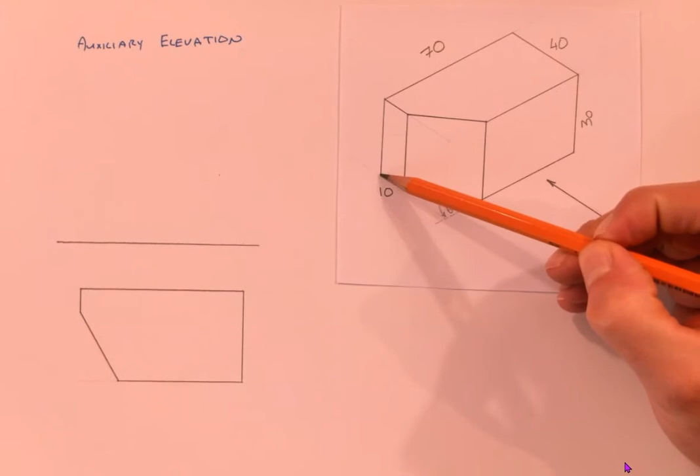We're going to draw an elevation and plan of this block that we have, and then we're going to project an auxiliary elevation. So we basically have just a simple box. Our box is 70 millimeters wide, 30 millimeters high, and then from back to front 40 millimeters. We're going to step in 10 millimeters along the side, and we're going to chop the corner off at 60 degrees. So we have a 60-degree angle here.

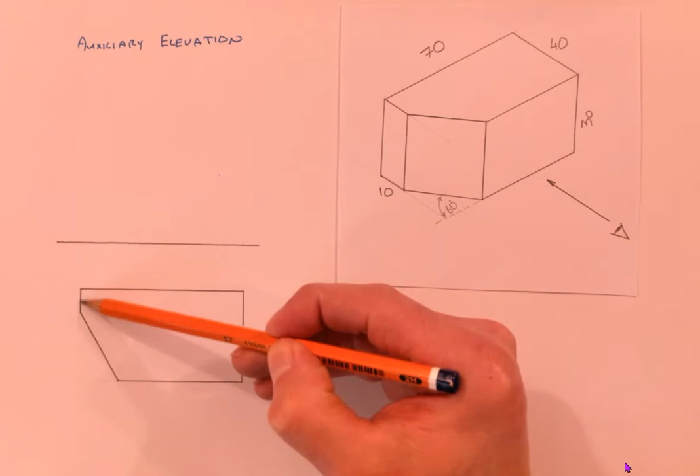So that's what I've set up in plan. We have to draw the plan first. The reason we have to draw the plan first is that I don't know what this measurement is here. We weren't given a measurement for that. I have to draw the plan. So the plan, 70 across, down 10, down 40, and then from here I draw my 60-degree angle, and then I can complete the plan. So I've got the full plan drawn in.

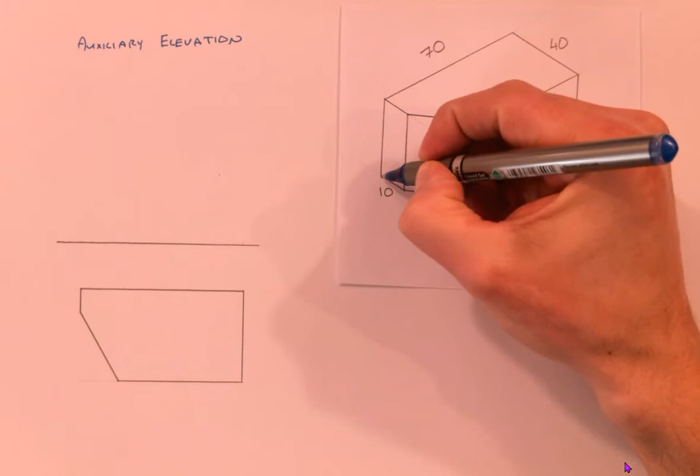I'm going to go draw the elevation, but first of all I'm going to go numbering the points on this box. We're not going to number all of them, but I'm going to start off with 1, 2, 3, 4, we'll put 5 here, 6, 7, and 8. And when we're doing auxiliary elevations, the numbering becomes very important. So I've numbered out all the points there.

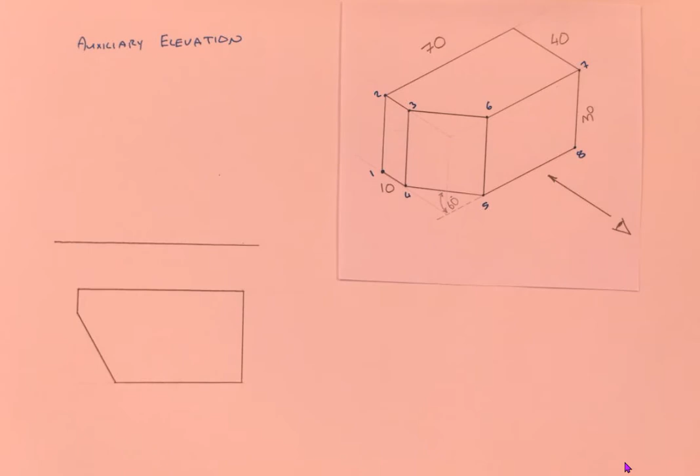I'm going to put those into my plan view. So my right hand corner here, the front right hand corner, has points 7 and 8 on it. When I look in plan, so I'm looking in plan here. So the front of the object is here. Front right hand corner we said has points 7 and 8. So 7 and 8 are here. That corner there is vertical, so it looks like a dot.

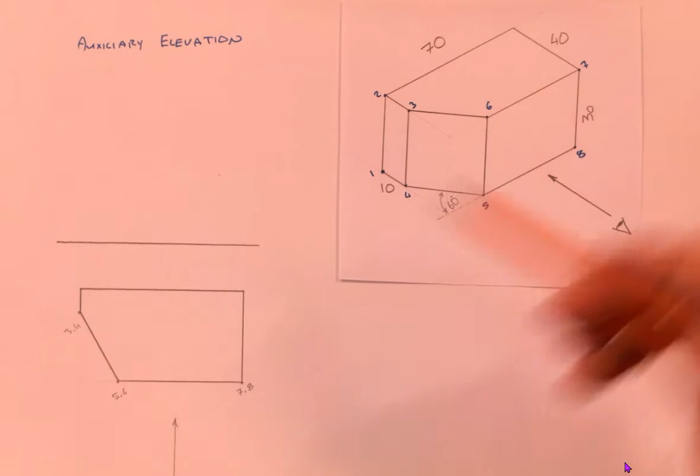The left hand side of that front surface, we've got 5 and 6. Here's the left hand side of that front surface. We have 5 and 6. The slanted surface is number 3 and 4 here. Here's our slanted surface. We've number 3 and 4. And then the back corner has 2 and 1. So back here we have 2 and 1. So make sure you label those points in.

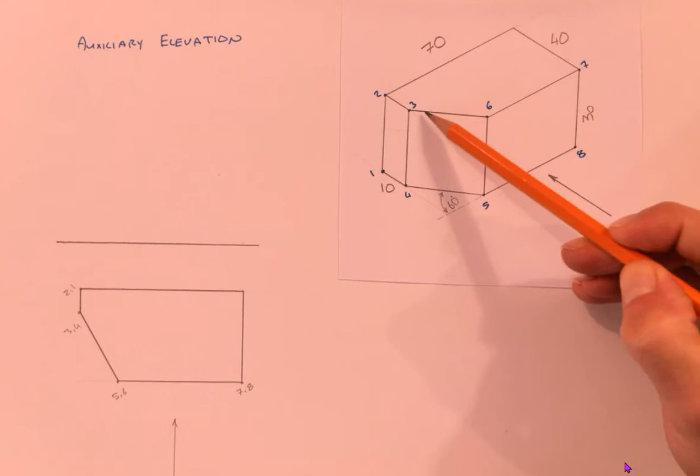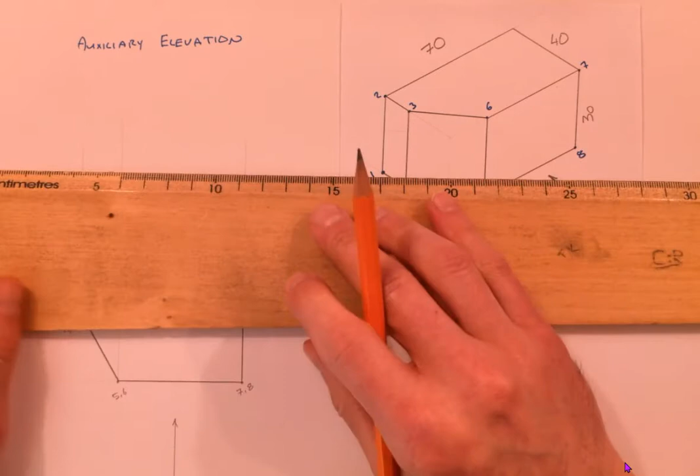I'm going to draw the elevation. The elevation is going to be very easy to draw. It's 30 millimeters high, and the whole top is horizontal. So all I have to do is measure up 30, and I can draw in everything then. I'm going to project up my points from the plan first of all. So I'm bringing up 5 and 6, and then 3, 4, and 1 and 2 are all in the same line. And then I just come along, measure a height of 30, and that'll let me draw in the elevation. So just darken all this in, and we have our finished elevation.

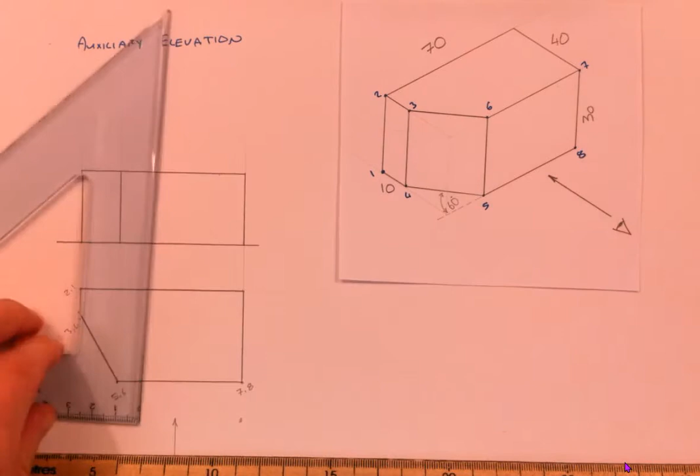So what we're looking at, the front of the object, here's the front surface. Front surface is here in plan, here it is in the elevation. So there's my front surface. My slanted surface, here's the slanted surface in plan, here is the slanted surface in elevation, and then the side, the very left hand side, here it is in plan, and it looks like a line in elevation, so we can't actually see that. That is our elevation and plan complete.

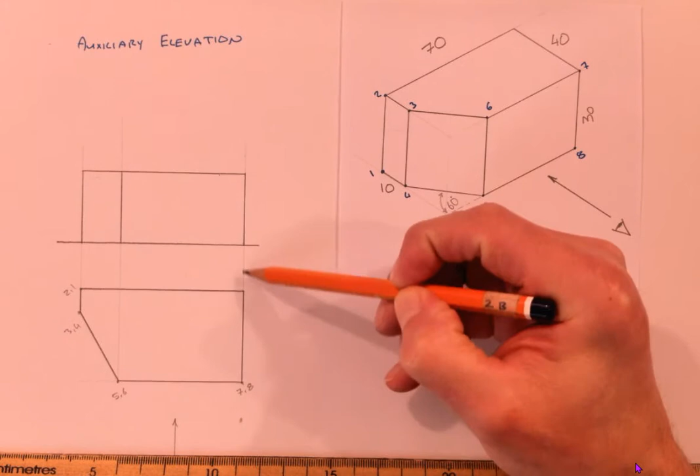I want to label the elevation because we're going to need that for the auxiliary. Now, points 7 and 8, when I brought them straight up, are here. I need to figure out which is which. You'll see point 8 is on the bottom, 7 is on the top. So when I come up, 8 is on the bottom, 7 is on the top. Likewise, 5 is on the bottom, 6 is on the top. When I come up, 5 is on the bottom, 6 is on the top of the elevation.

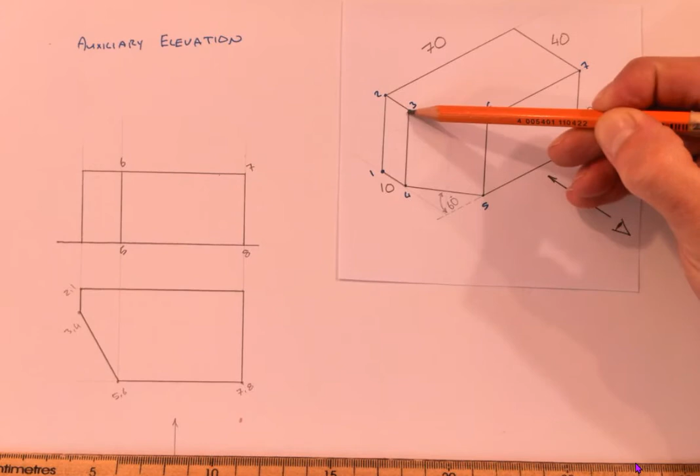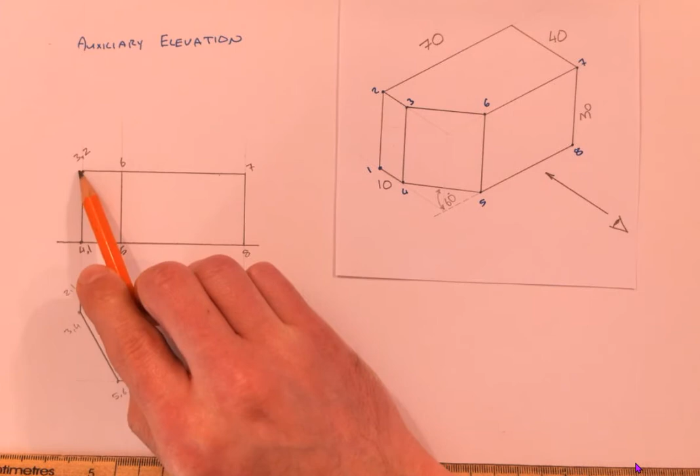4 is on the bottom, 3 is on the top. So when I come up, 4 is here, 3 is there. And then right in behind, 1 is on the bottom, 2 is on the top. So again, when I bring up 1, 2, we said 1 is on the bottom, so 1 is actually going to be in the same position as 4. 2 is on the top, so 2 is up here, so it's in the same position as 3. So that point there represents both point 3 and point 2. So that is my labeling finished.

Now, where auxiliary elevations come in really handy is they can give us extra information about an object. So I'm going to label this as S, surface S. I want to find the true shape of surface S. So I want to see what does that surface really look like. In other words, what's the real height of it and the real width of it. At the minute, here is surface S, and this is surface S in plan.

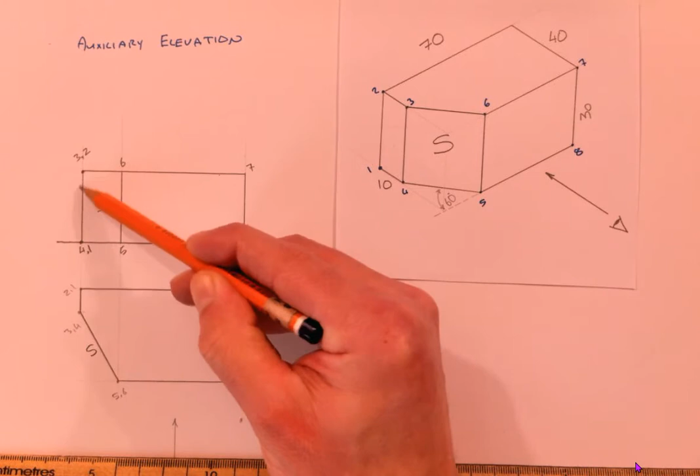That doesn't show me what it really looks like, and this is all squashed up, so I can't see what it really looks like. So neither of those views are any good to me, and that's where auxiliary elevation comes in. So what I'm going to do is draw an auxiliary elevation to show the true shape of my surface S. To do it, I need to look in at 90 degrees to the surface.

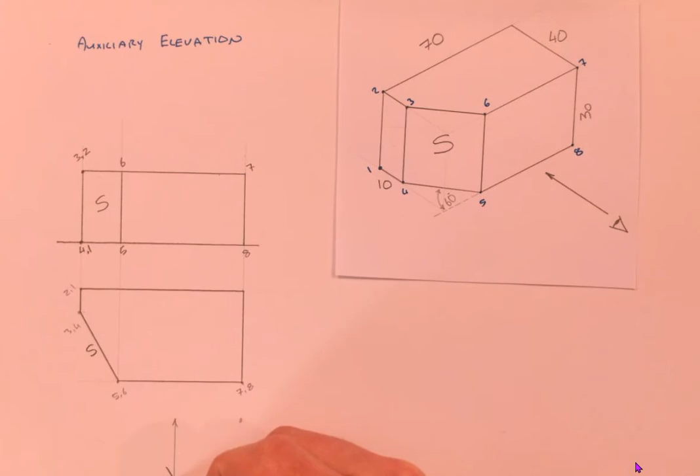So what that means is that at the minute I'm looking down here. Here's my line of sight, looking in from my normal elevation. I'm going to draw a new elevation, and I'm going to draw it out the side here someplace. I need to look in at 90 degrees to this surface. 90 degrees to that surface, and it's only roughly I'm drawing this, is in here. So I need to look in here at that surface.

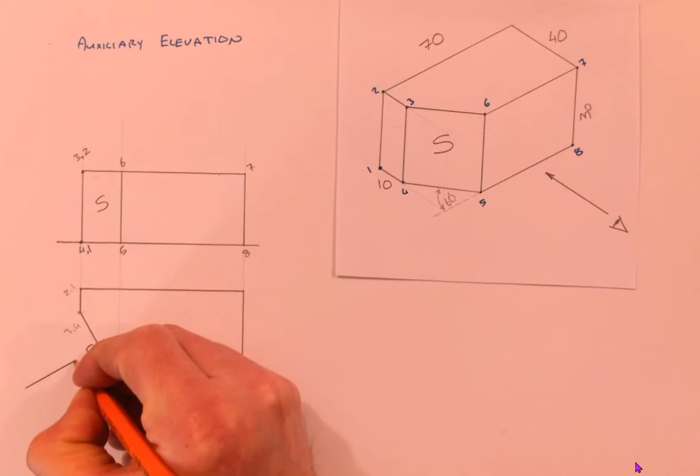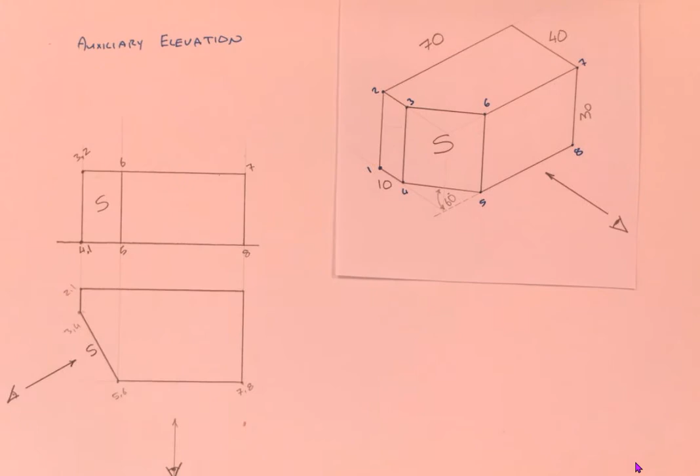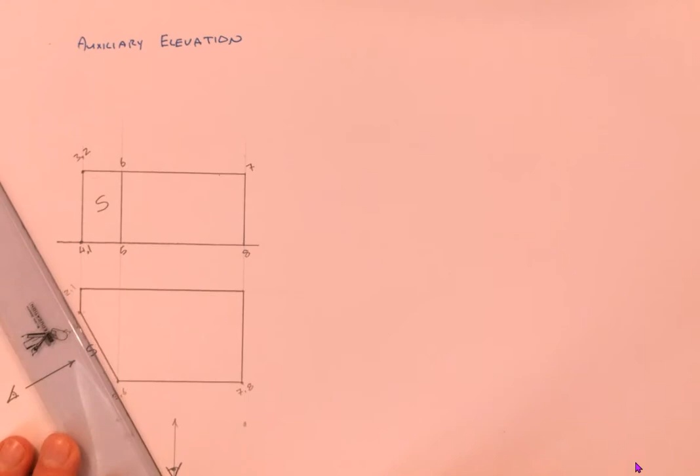So for me to see what surface S looks like, I need to walk from here. I'm going to walk around, and I'm going to stand and look in here at the object. So to draw it, I'm going to take this out of the way because I don't need it now. The surface S is at an angle of 60 degrees. I need to draw a line at 90 degrees to that, so it's just the opposite, which is a 30 degree angle. So I'm going to project out here at 30 degrees.

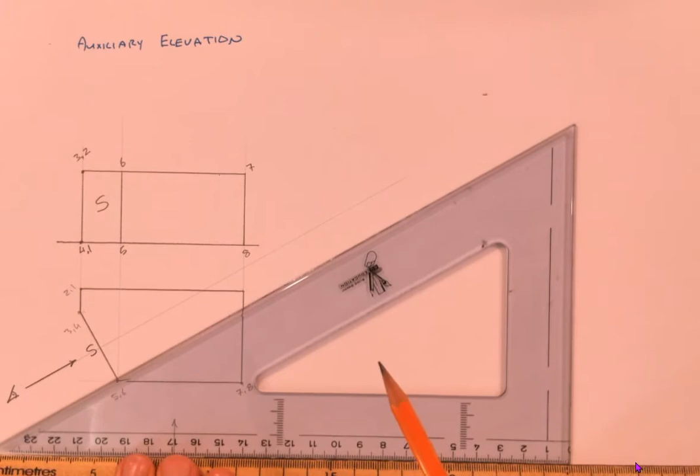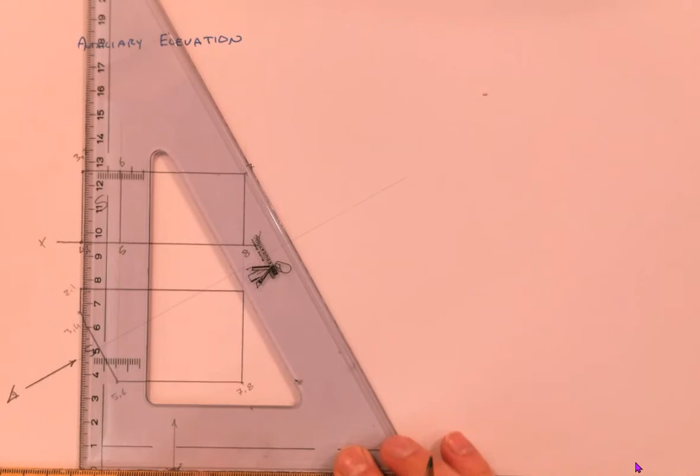So I'll just take any point out to begin with. So I'll draw a construction line out at 30 degrees. I'm going to set up a new XY line. So here's my XY line for the first drawing. I'm going to set up a new one. And again, I'm going to use my 60 degree set square. And I'll draw my XY line here. Doesn't really matter where. I'll draw my XY line. It's a different XY line, so it's called X1, Y1.

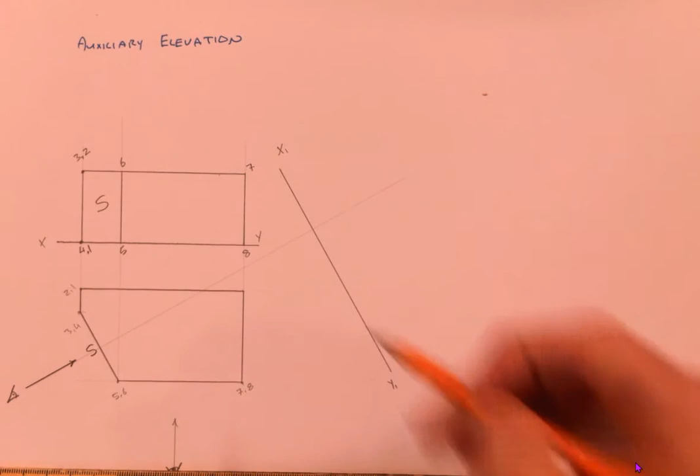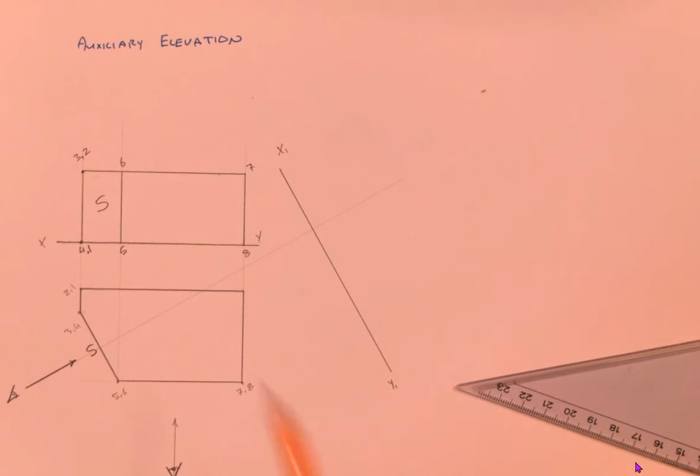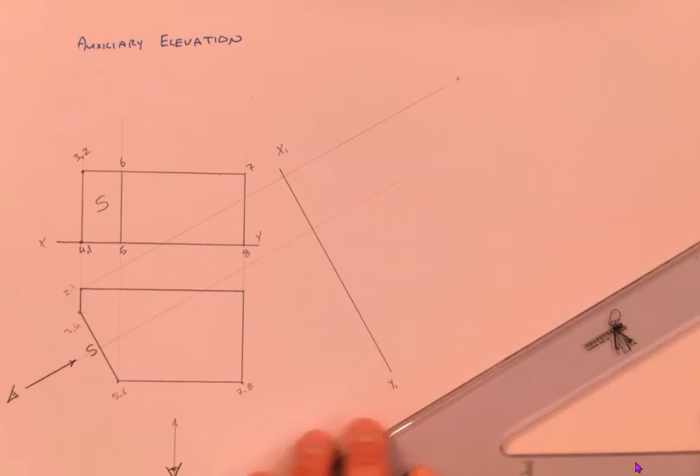It's at 90 degrees to the construction line. So I drew the construction line at 30, drew the XY line at 60. Now I'm going to project out the points. So I've got points 1, 2, 3, 4, 5, 6, 7 and 8. So I'm going to take my first points, 1 and 2. So I'll project those out at 30 degrees. Back to my drawing. Height of 1 was 0. It's on the XY line. Height of 2 was 30. It is 30 high.

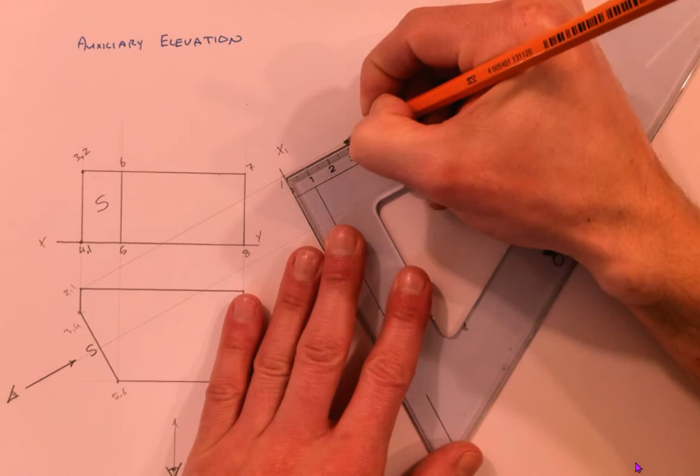So I can come along and say it now. 1 was on the XY line. Point 2 had a height of 30. So I'm measuring up 30 along the line. So there's point 2. Again, when I come along, point 4 had a height of 0. It was on the bottom. 3 is 30. So I can do the same with all these points. So I bring out my line. So point 4 we said is on the bottom. Here is 4. And number 3 had a height of 30 also. 5 and 6 the same thing. Bring out 5. 5 at a height of 0.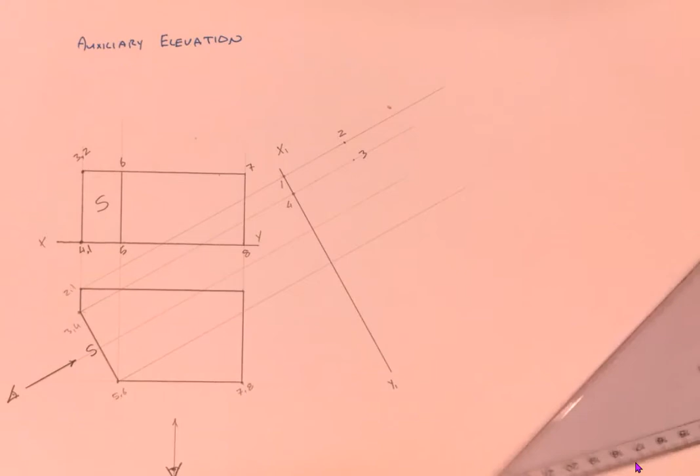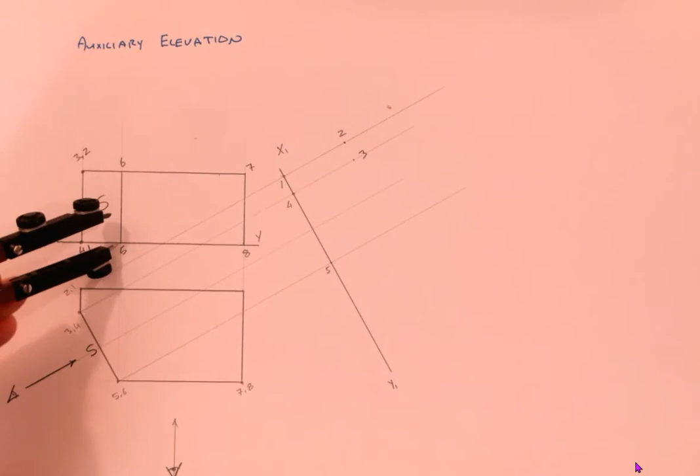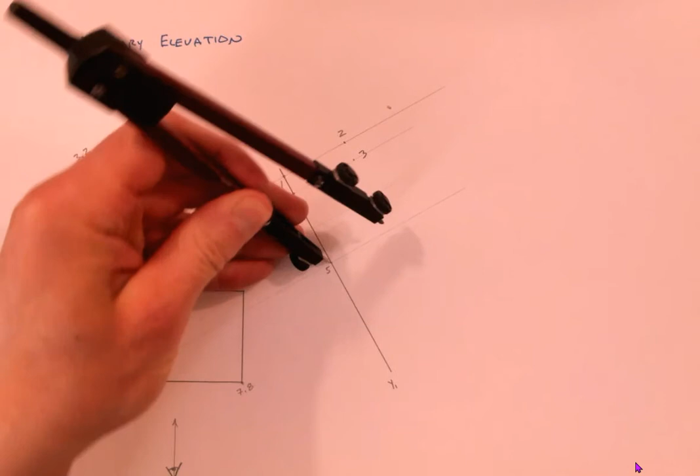Now, instead of me using my drawing, I can use the actual elevation up here because I've got my heights already set up in the elevation. So if I want the height of number 6, what I can do is just copy it. Here's the height from the XY line up to point 6. I can take the same one out. So I follow out my point 6, and from my XY line I measure up. That is the height of 6. Last two then is 7 and 8.

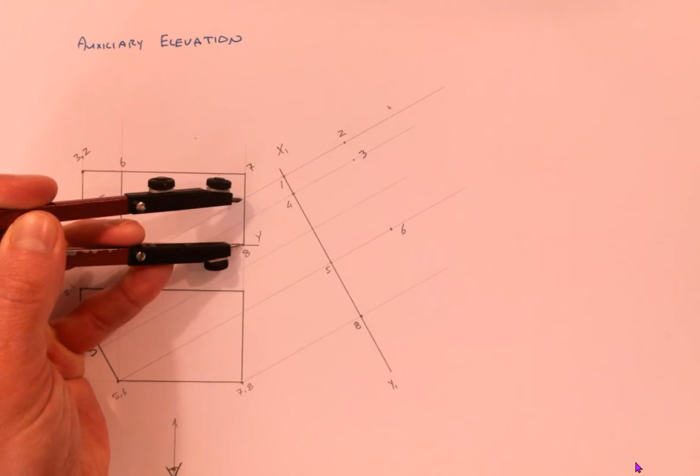And again I bring it out with the 30 degree set square. Height of 8 was on the ground. I can see it here. It's on the ground in my normal elevation, so it'll be on the ground in my other elevation. So it's on the XY line. Here is 8. Height of 7, again, I can copy it from this elevation. That's the height of 7 from the XY line. And when I come out, here is the height of 7. And because it was horizontal, I can draw parallel to this XY line here. These should form a perfectly straight line.

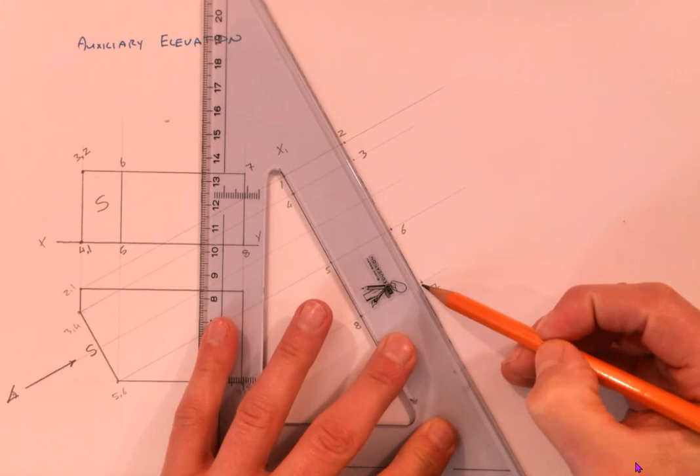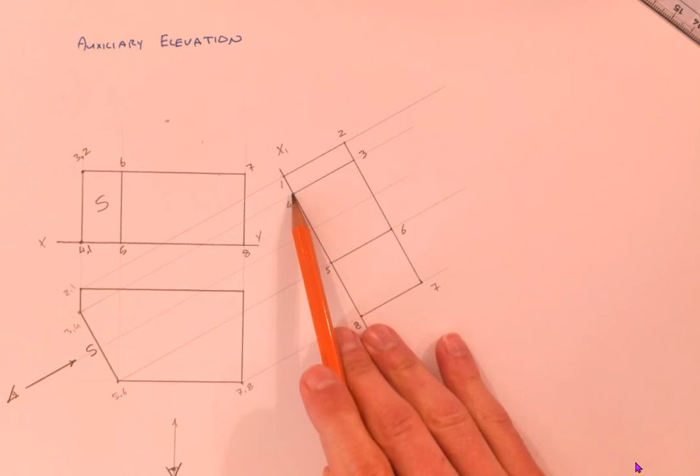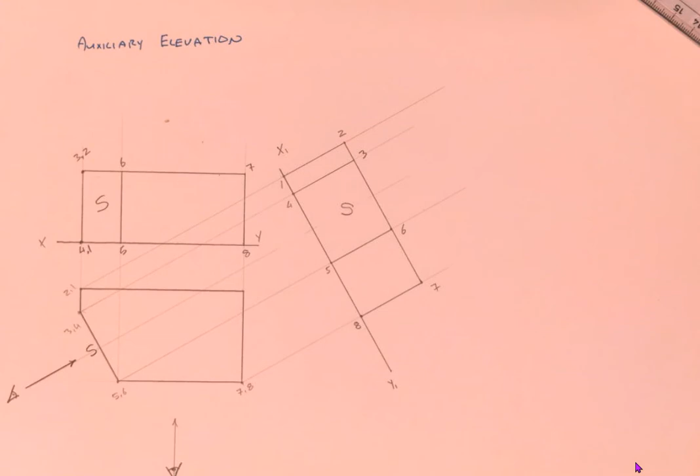So what it's showing me is I've got my narrow surface here on the left hand side. Here it is. My surface S is the true shape, so I see what the surface S actually looks like. So now when I draw it in, here is surface S. That's what it really looks like. And then I've got my front here. This is the front of the object, and the front now looks a bit squashed up because I'm looking in at an angle. And that is my auxiliary elevation completely finished.